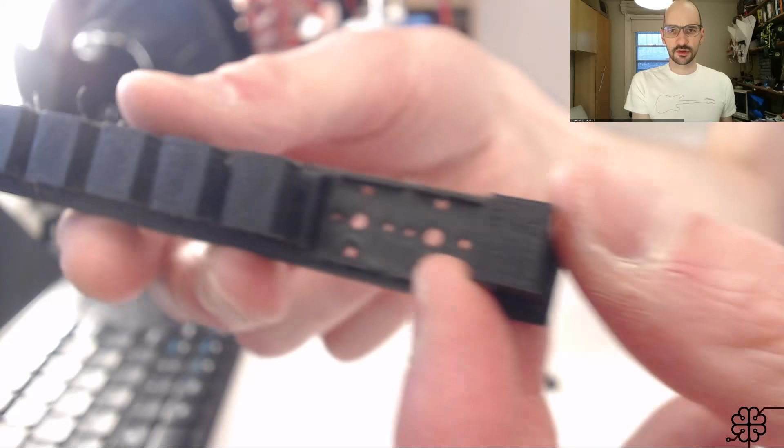it's quite close. This bracket was a two switch bracket that I printed last time, and it got me extremely jazzed about the prospect of printing out a full bracket for all the buttons and trying that in the keyboard. So that's the next thing I did, print out this bracket right here. Sorry, I'm still trying to get used to this focus control. So there you have it. It was this multiple switch bracket, and I put that in the keyboard, and it felt great. It was really motivating.

However, it wasn't quite exactly right. It was off by something like 0.5 millimeter on the total length, and as we'll see soon, I definitely need to redesign the way that these switches fit into this thing. They need to be seated much deeper into the keyboard. The reason I'd come up with this flat design at the very start was that that's the way the original rubber dome switches worked.

But unfortunately, after having looked at my keyboard and taken a lot of measurements, I'm pretty sure that they changed the inside of the version 2 of these keyboards, which had these switches mounted in by default. The switch really has to sit much deeper inside the keyboard than the original rubber dome switches. So we'll be changing that design. I've started on that. You'll see that in Fusion 360 soon.

And so you can see here I've got all these little spare parts. All these things are tests that I made. I iterated 1/4 millimeter here, 1/4 millimeter there, on designs, and got everything dialed in right, such that the length would be okay, and these little ridges here that we print, I use them as registration features, so they fit within the keyboard.

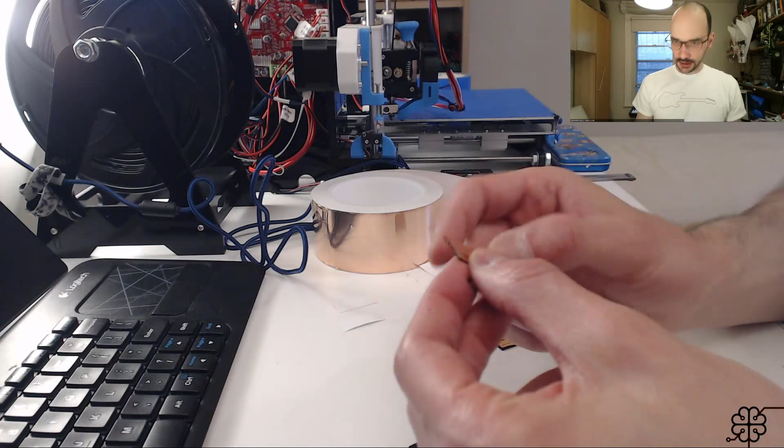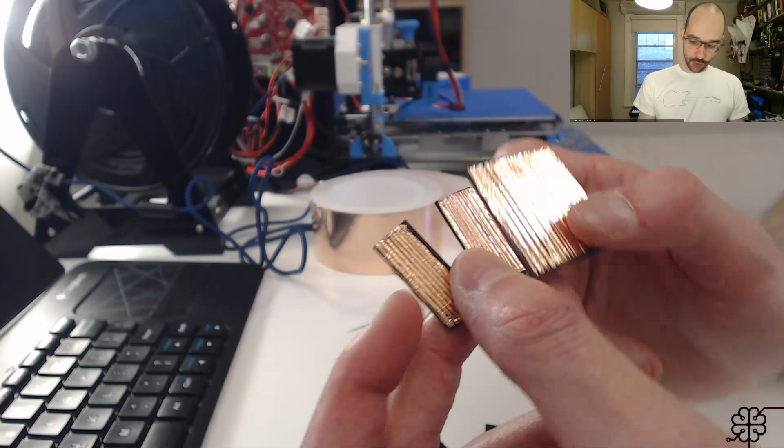Then another thing I've done, which I'll show here quickly, is to iterate on the design, or rather the tolerances, for the actual printed circuit board later on. So the idea here is that I've printed these pieces. I'll show them up close in a moment, and you can see that they've got these, well, really what they are is isolation trenches, if you will. And what I've done is I printed this design. I'll show what it looks like in Fusion 360 in a moment.

What I did is I took this copper tape and I just stuck it on top. I put a layer on top here, and then I pushed into it a little bit with my thumb so that I could see the grooves. That's the word I was looking for earlier. Grooves. So I could see just the outline of the grooves. And then I took a hobby knife, like an X-Acto, and I ran it right down the grooves. And the purpose of this is to cut the tape.

The tape's adhesive is very strong. It doesn't move when you cut it, and the tape is pretty thin, so it doesn't give much resistance. You can cut through it pretty easily.

But the interesting thing with this that I was trying out is basically a variety of widths of grooves and a variety of depths of grooves. You can see here, this half here is slightly shallower than this half here. And the reason for that is because when you cut the tape, the knife kind of pushes down into the tape and it separates it into the groove, and it creates an isolation there between these two traces. And I tried this in the past for another project with Halloween, and it actually turned out great.

This time I have a bunch of ideas to kind of simplify the process and the design. I also only have a single-sided PCB to do this time, so it's going to be much simpler. Or I hope. There's a few sort of constraints that come with working inside the keyboard and stuff like that.

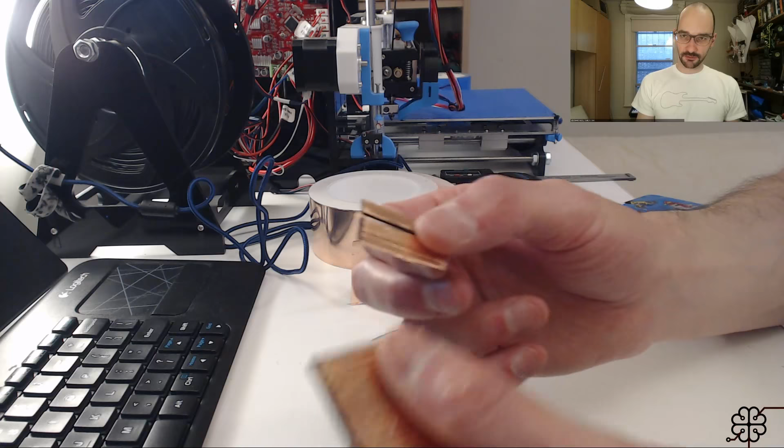But what's good about this is that pretty much every single test, every single trace on these boards here, and there's what, like I think two dozen or more, they all turned out great. I mean, cosmetically speaking, some look better than others, but functionally they're all the same. All the isolation worked properly. So it seems like I have quite a bit of leeway there with these tolerances that I can play around with when designing the final PCB.

One thing that I'll have to worry about actually is if you look at this bracket, let me take control of the focus once again, but if you look at this bracket here, what happens is the switch sticks out through the bottom of the bracket like that. You can see the plastic pins here, they stick out, and you can see the metal pins as well. Now these metal pins here, and on this side here, these are the pins that I need to solder to. When you close the switch, these are the pins that are going to actually close the circuit. But as you can see, the pins are not super long.

I'm not actually sure the depth of this mounting plate that I printed there. I initially thought it was like 0.5 millimeter, but now that I look at it, I think it's a bit more than that. Let me just measure that quickly. It is actually 1 millimeter. So that's good. That means that I have a bit of leeway here. Actually, I'm less worried now that I have 1 millimeter. I probably have another millimeter or so that sticks out. So 1 millimeter is more than enough for the thickness of the PCB.

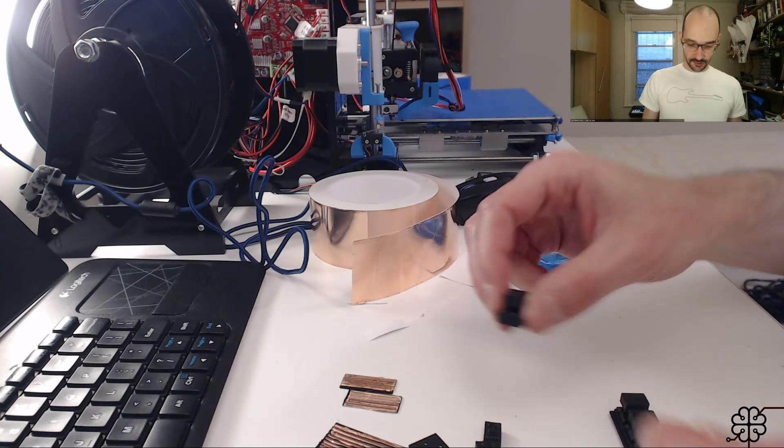But I'll have to think about how to print this, because I obtain the best results when the isolation traces are on the top side of what's being printed. If this stuff is on the underside, then the first layer of a 3D printer, you have this problem with any printer, has to be squashed a little bit into the print bed for the adhesion to be good. Otherwise the print just comes off the bed when the printer works.

And so that creates this phenomenon called elephant's feet. Now it's only called elephant's feet really if it's super pronounced, if you really wind up with this sort of flattened shape because everything was squished so hard into the plate. But even if you dial it perfectly, you still kind of want this smoosh on the first layer, so that everything sticks properly. And of course that affects the width of the isolation groove here, and it makes running the knife down it a little more uneven,

and I suspect it would make the whole process a little less reliable, which obviously we don't want. I mean, it's not like an incredible amount of traces here, but I'd love to figure this out so that it was kind of a more generic method for people to work with very short prototype runs in the future. Because I actually think this is quite convenient to work with.

And I'm also going to try to work out some kind of a workflow on the Fusion 360 side, such that it's actually easy to work with this in Fusion 360 as well, to create the isolation grooves and everything. So without further ado, let's go back to the desktop for a minute. I'll show you the work I've done in Fusion 360 since last week.

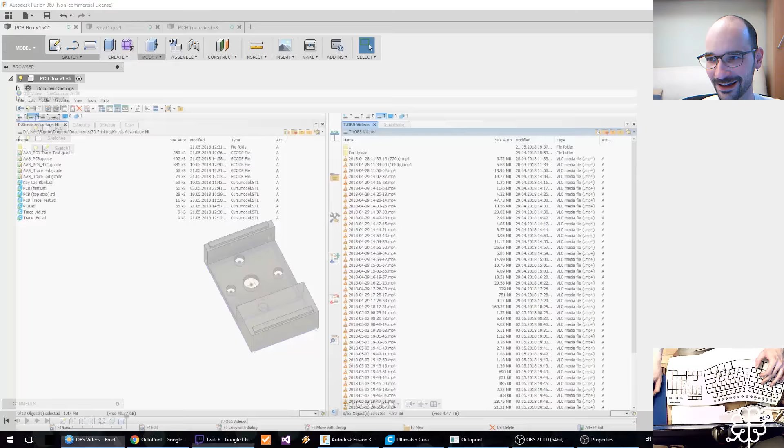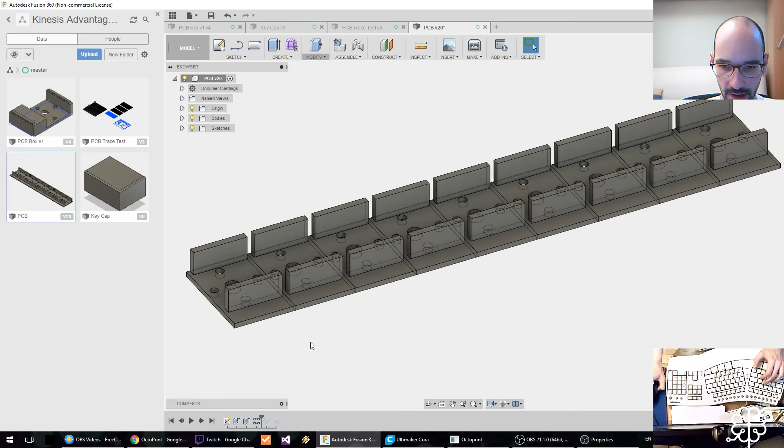Thanks for joining. So what I wanted to show last time is this old version of the PCB that I had. It looked a little like this, you've seen me print this. Obviously these registration ridges are a little deeper than last time, just things I tried out. But one thing you'd seen me do is when I was mirroring these things over, I was trying to do this join operation, and it wasn't joining up quite right.

What you saw me do, which kind of sucked, was in this distance field, I'd subtracted just a smidgen, just a little iota, so it would force the bodies to overlap, and then the combine operation worked. I kind of glossed over that in the video because I wasn't 100% sure what was going on, and I made a mental note to come back to it, which I did, but I didn't want to spend an hour digging into it.

As it turns out, what was wrong was that with the PCB sketch, I basically had two lines on the right side, overlapping lines that looked like they were exactly in the same place, and they were, but they were driven by separate dimensions, separate mathematical equations. Because of this, even though the lines were physically overlapping, it actually created something.

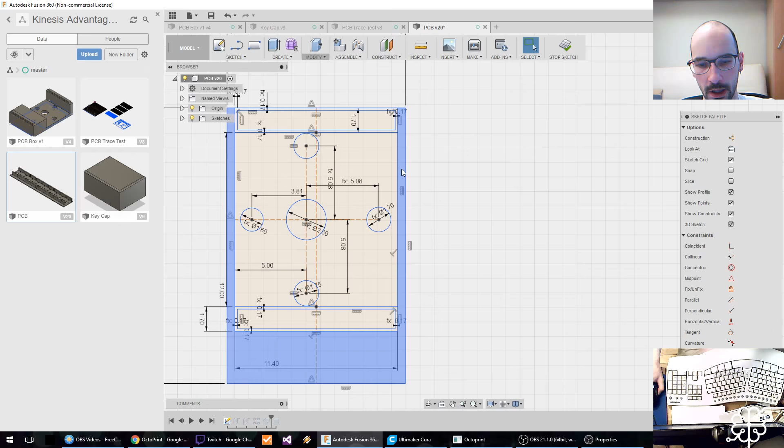You see how when I mouse over this, this is called a profile, could also be called a region. It's an enclosed area of the 2D drawing that you then extrude. When I say extrude, I mean this—this is the first part that I extruded here. You select which of the profiles you're going to extrude.

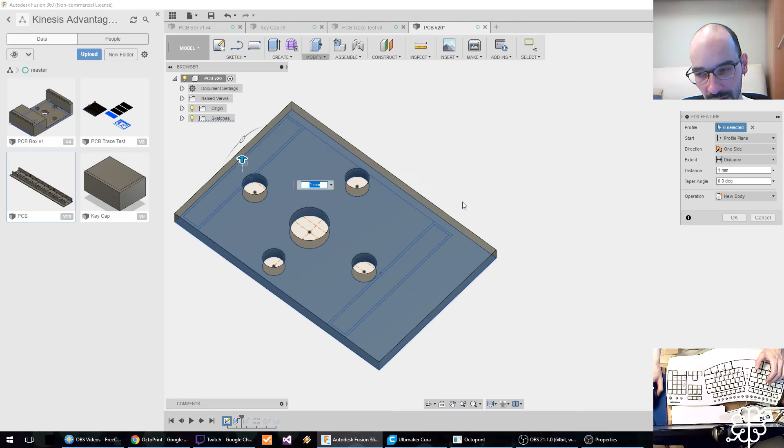It turns out there was this extra invisible profile along this edge where there was my duplicate line, and that profile had not been selected for extrusion. So there was effectively this infinitesimal gap on this side, and when I was repeating the design over and over, this gap was preventing the bodies from joining up.

The reason this became apparent eventually is because I was playing around with this parameter, basically the key tray width. If I make this extreme, you can see it widens it—the width becomes everything, all the dimensions are keyed and programmed properly. But because my profile hadn't been selected, I saw this big, tremendous gap show up here.

And I was like, aha! So there's something there I'm not extruding properly. I went back and saw the missing profile was showing up in the sketch, and I was able to select that for extrusion, and it fixed all my problems. So I'm going to undo this.

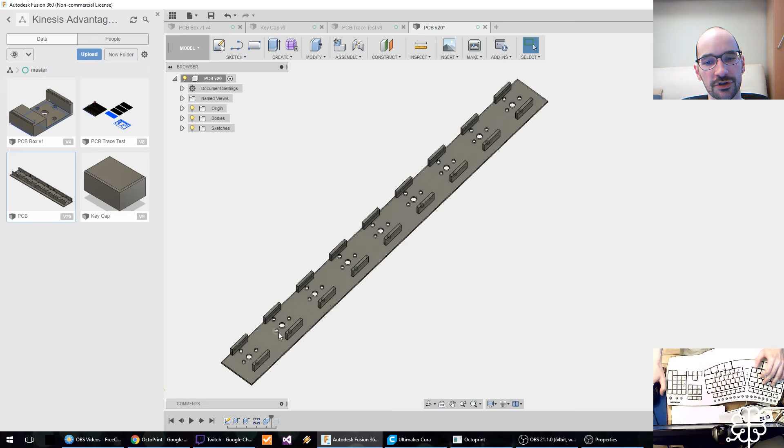This was my original version of the PCB. I moved away from this design for a couple of reasons, but one of them is really important. You can see here what I was trying to do was, if I mount the switch inside this bucket, the switch would be facing upwards. Let me sit properly in my chair so you can see my face when I talk.

The switch was mounted upwards, and this part, these ridges, were used as registration features so they would sit inside the keyboard. There's a kind of grid inside the keyboard, and these would fit perfectly inside this grid.

Originally I pointed out last episode that I realized the switches needed to be mounted even deeper, so instead of mounting them as close to the faceplate as I could, I tried to make these ridges thicker, or taller, so they would rest against the front plate of the keyboard. I'll show that on the other camera in a minute.

But the problem here is that though the grid against which the flat plate rests is completely flat, these ridges rested against the actual front of the keyboard, which you may remember is actually quite curved. It's curvy.

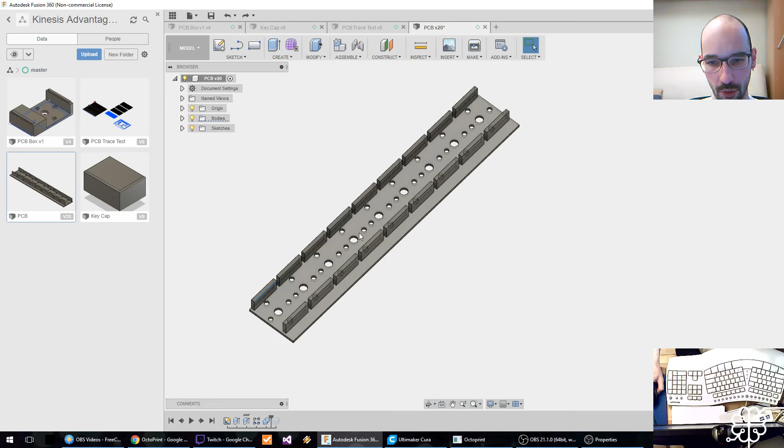So what was happening was, on this side, these were kind of bumping against the faceplate, and the switch was mounted at the right depth. Then as you moved over inside the keyboard, there were curves in the faceplate, and it was actually putting the switches at variable depths inside the keyboard. Not only that, but because of the curve, the full length of the ridge would not rest properly on the faceplate, which is incorrect.

So let me go back to the other camera for a sec, just to show you exactly what I meant.

So let me take over the computer again here.

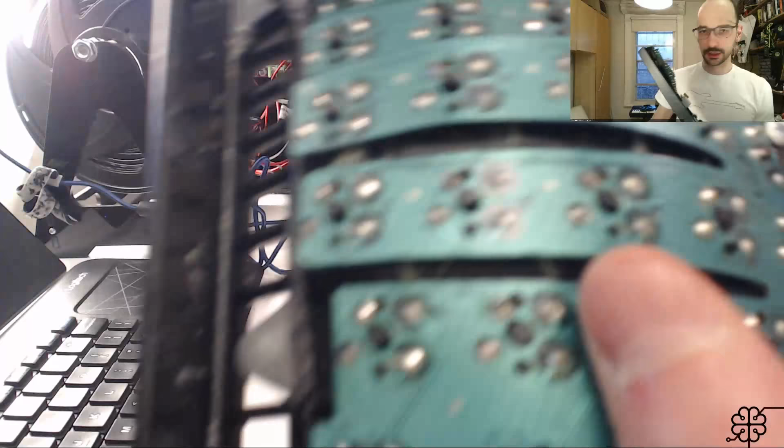You can see here, this is what I was talking about earlier. I'm not sure whether I should actually just manual focus this. Let me try for a second. Is this too much? It is too much, let me scale that back out.

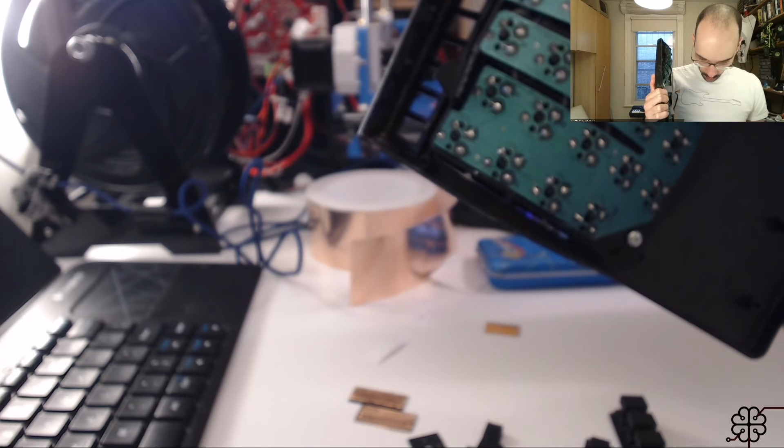So you can see this kind of grid here around each hole for the keys. This is where the ridges I showed earlier would wind up registering properly. You can see these ridges quite well on this print. So if I fit the piece inside the keyboard, it fits nicely and doesn't move left to right because the ridges fit inside the grid.

Now obviously it moves a little bit on this side. This is something I fixed in later designs, but it doesn't move sideways much, if at all. However, if you make these ridges thicker, what happens is instead of resting against... let me tilt this. Yeah, there you go. So instead of resting against these little ridges here, it rested against the actual inside of this part, the very underside of the faceplate, which I don't know if I can tilt it enough to show you.

It's kind of hard to see, but the grid at the top is completely flat. But maybe if I show it like this, or maybe like this. There you go. You can kind of see how this top part here is super flat, but the inside of the grid is quite curved, and the profile here varies quite a bit.

So these ridges were trying to rest against the faceplate, but in this hole they were much more deeply seated than in this one over here where it's quite shallow. So that's not correct. I had to go back to the drawing board.

And then what I did is I printed more something like this. Well, this actually was my test with the super deep ridges there. But the latest prototype that I have looks a little more like this.

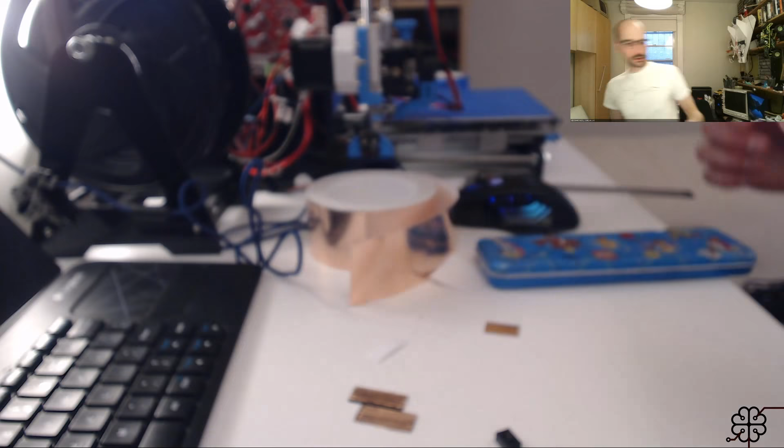Let me set down the keyboard for a minute. It's the one I showed earlier. I can actually crank up the zoom just a little bit for this. Whoops, there we go. And so from the side, what this looks like is quite different, right?

The registration ridges are still there. They're very small though, but thick enough to actually fit inside the keyboard and not move. I am going to make them a little thicker in my next design. I think this is something like 0.2 millimeters, maybe not a lot. I'm not even going to try to measure it.

And if I make it a bit thicker, you can see how there's this deep groove here, like a box, a seat almost for the switch. That allows the switch to sit much deeper inside the keyboard. And the idea is for these flat parts here around the grooves.

So you know what, I should grab something to point. There we go. So this flat part here - whoops, sorry about that - this flat part here, and the flat part around the ridge, it's very small, but there is actually a lip around this ridge. These are going to rest against that flat frame inside the keyboard.

But even this is not quite right. I was playing around with this earlier. It's getting there, but there's a few issues. And the reason for that is actually I'm on the right track. It's just that when you look at...

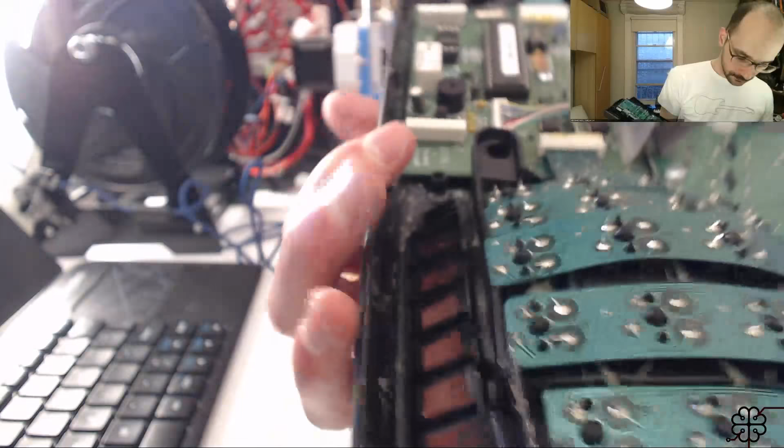...inside of the keyboard, what happens is you've got these other things starting to come into play now. You've got these little ridges here, here, and here. I believe these are known as ribs in industrial parlance. There's also these nubbins here, that's a technical term, that used to hold down the original PCB.

Now, anybody who wants to replicate this modification, I hope this is the only modification you have to make to your keyboard, other than soldering these connectors.

Eventually this connector here is going to have to probably go away because it's going to be easier to solder to the pins directly than to reuse the original ribbon connector. But you have to cut these little plastic nubbins off, the first time you run into problems with your function switch. As soon as you want to get inside the function switch assembly, it's the only thing that is irreversibly assembled inside the keyboard, meaning it's not screwed down, and you can't just trivially take it apart and put it back together exactly the same way it was.

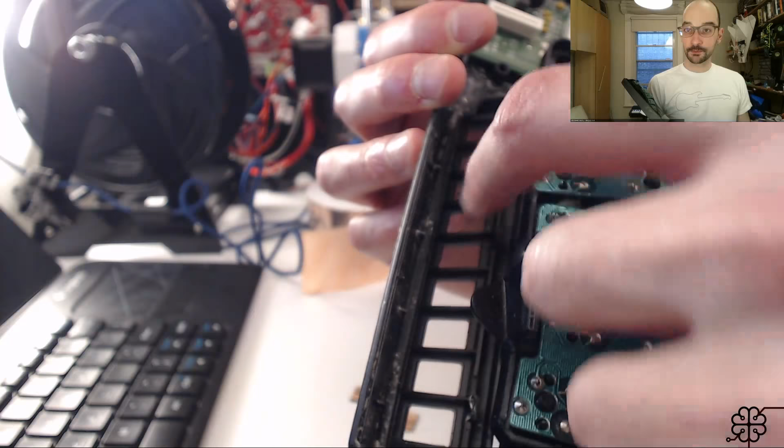There's a plate there, a plastic plate, and then there's a bunch of... or sorry, it's not hot glue. What they do is they put the plate through these plastic things and melt the plastic. They melt it down above the plastic plate, and it holds it in place very securely.

Now, as soon as you want to get in there, you have to cut these away. I used a very sharp knife the first time. That allowed me to extract the plastic backing board there for the PCB, and then I just hot glued it back in place, which was more than enough to hold everything in place.

As it turns out, if you look inside the keyboard, I'm going to try not to rely on the shape of these nubbins, because if you cut them off completely, it should still work. But what I'll probably do is make it so my design kind of rests on the underside of this bit here. Even though it wiggles a little bit, this actually rests against the bottom of the keyboard here.

There are these plastic prongs here that rest against the bottom faceplate, so when the keyboard's closed, it doesn't move at all. I might actually try to exploit this screw hole here, which interestingly enough does not appear to be used in my version of the keyboard. It appears to be quite blank. I can see that it's been, I think, tapped even, I'm not sure, but there's certainly no screw that goes there on my keyboard. I'm not sure what it was for, maybe it's for another revision of this keyboard. I'm not 100% sure, a leftover.

So, yeah, there you have it. What happens with this bucket prototype here, let's call it the box or bucket prototype. I'm going to switch back to autofocus for it.

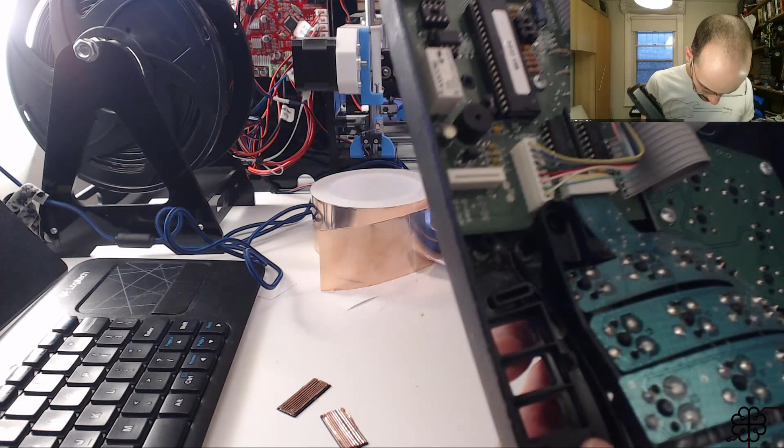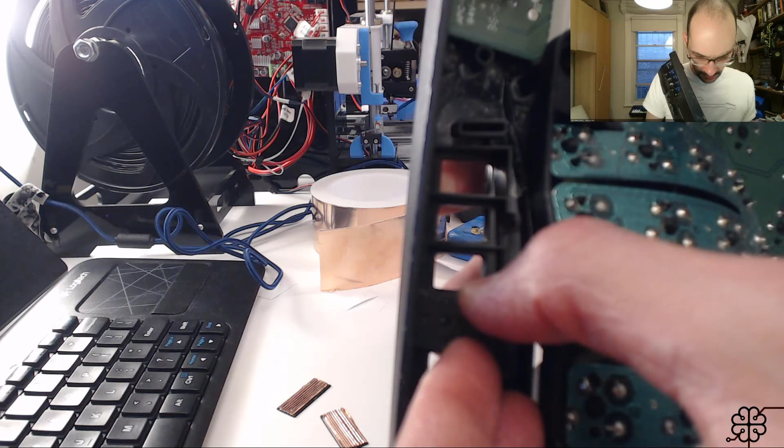Now, yeah, if I line up the back side really properly, then the front side doesn't work anymore. So the switch is a little too high in the bucket, so I'll have to change that just a little. It's like a smidgen, a very, very small amount, like not more than, I think, 0.5 millimeter or something. Oh there, we lost the switch. So move the switch down a little bit. I'll do that in Fusion 360.

Do I need to do much else actually? This thicker part here at the bottom is going to help with the rigidity of the whole design, because I'm probably gonna have to make the bottom part a little weaker, actually a little thinner. I'll make the ridges a little thicker as well, and I'll have to figure something out for these ridges here.

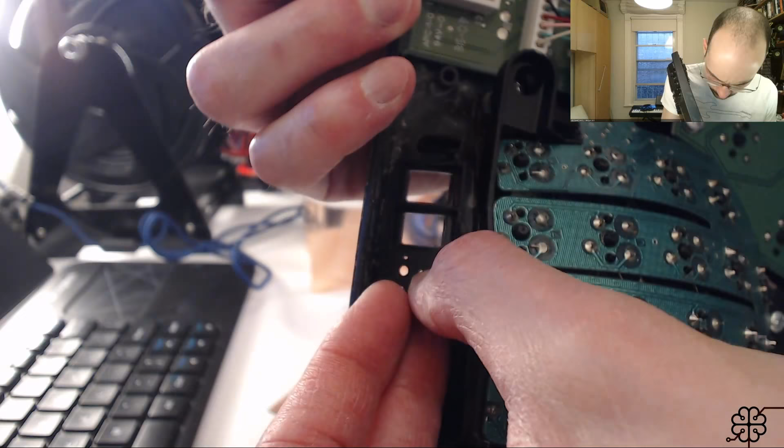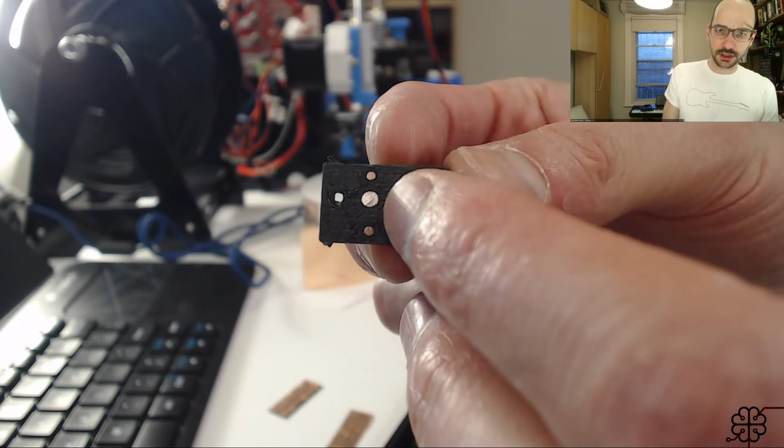To make sure that I don't run afoul of these ridges here. So, does it actually fit in there? Yeah, it doesn't even really fit inside the hole because the rib is protruding too much. Yeah, okay, so, if I move the switch down a little bit in this design, it gives me a little leeway to maybe kind of chamfer this edge or something to try to get rid of the rib.

So let's do that. Let's go back to the other station for a sec and start a print. And then probably what I'm going to do is I'm going to start on the PCB design. All right.

What's going on here? I've lost my music. All right, well, that's sad.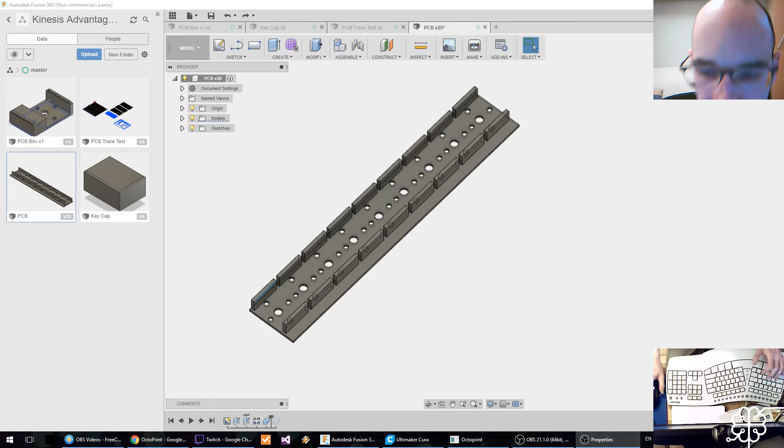Oh well. All right. So let's close this. No, don't save. It's my PCB trace test, my keycap. Probably make the keycaps a little smaller even. All right, so we said the ridges need to be a little bit thicker. Oops, sorry about that.

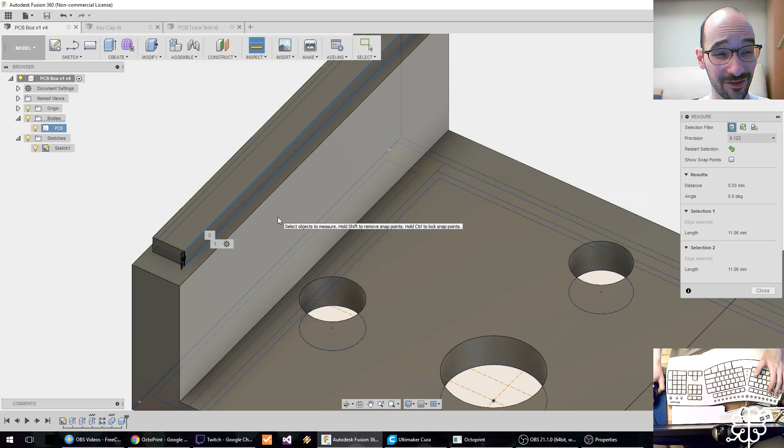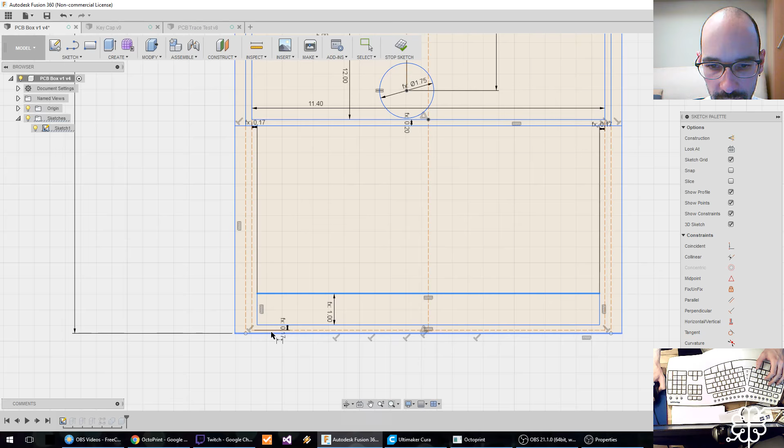But that moves the wall. I got this keyed wrong. Okay, wait. This is not correct. Okay, what's going on here? This is between this line and this dimension here. So I'm going to get rid of this dimension here. I am going to instead dimension from here to here, which I know would be good. Okay, 1.27.

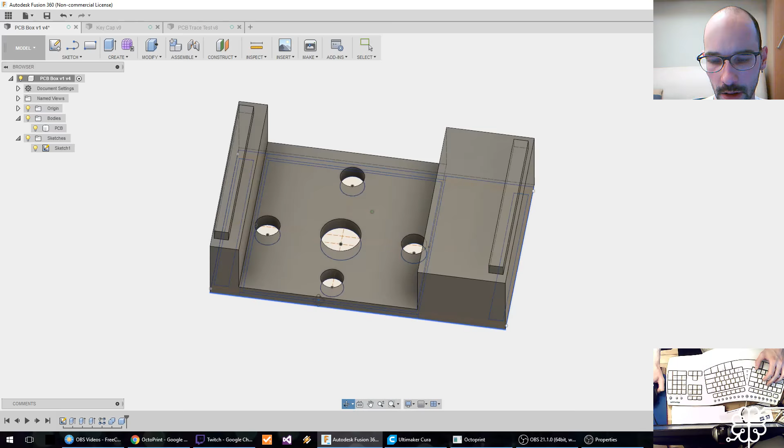So now, if I move this guy down, all right, the bottom ridge doesn't move, which is good. And the box moves. All right, that's good. So 0.5 millimeter. And then I said I was going to try to do something about the chamfering here. So let's suppress this for now. Should I chamfer before or after the depth? Probably before. Okay. And then let us chamfer this.

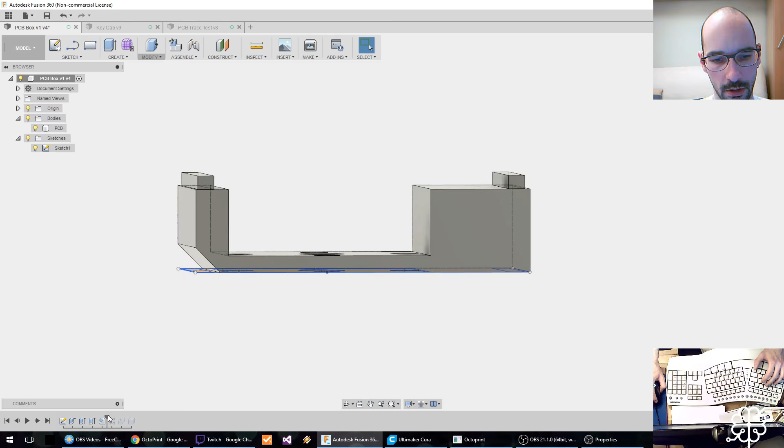Yeah, see, I don't want to chamfer too much, or maybe a draft. I don't want to weaken it too much. That's the thing, right? Well, it looks like I can actually do a little bit more. Maybe like 1.5 millimeters. There we go. And if I, all right.

Actually, sorry. This no music thing is driving me mad. Let's figure out what's going on here. Will Winamp work? It does. So what's going on with Plex? Is it somehow dead? No, there we go. All right, the music is back. Sorry for this brief interruption.

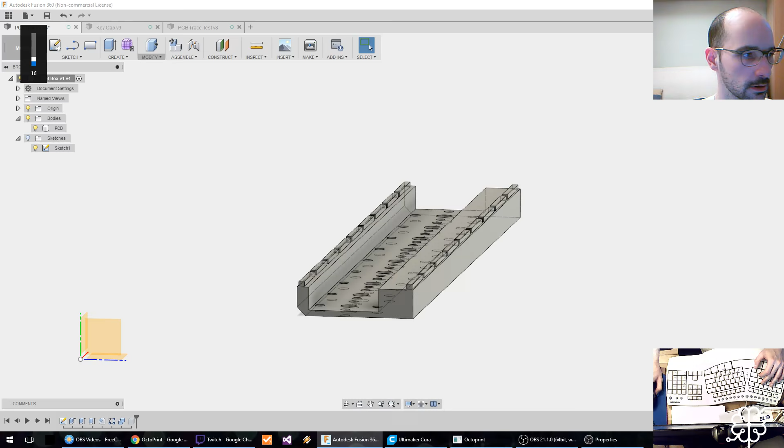All right, so I think this looks promising. Now, if I unsuppress, this feature is just to do one at a time, right? I don't want to have to print the full thing, though I could actually print two to make sure that the registration still works properly. Okay, so I'll print two. Like that. Alright. This doesn't look too bad. Oops, sorry, that was a miscued command.

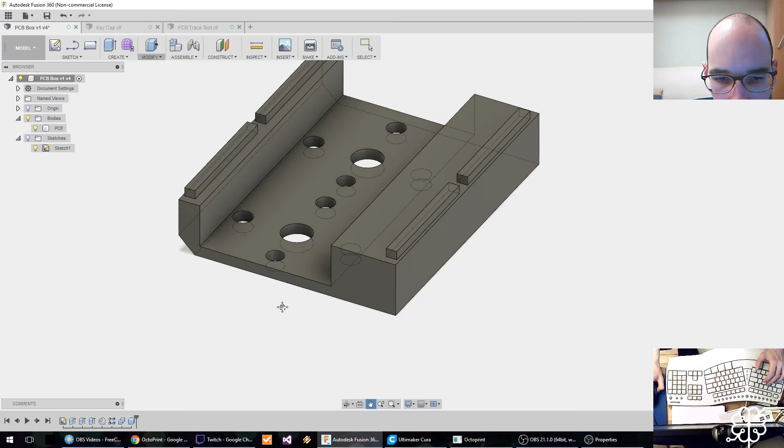See, this is a 45-degree overhang as well. A good printer, yeah, welcome back, Daru, will typically print up to 45, that's pretty safe. 45-degree overhang, meaning that this is going to be flat on the ground and it's going to print like this in a basically rising slope above nothing. But if you go up to like 50 or 55, then you're starting to get into wobbly land. But really good printers will do up to like 60. I think some printers even do like 70 with reasonable results.

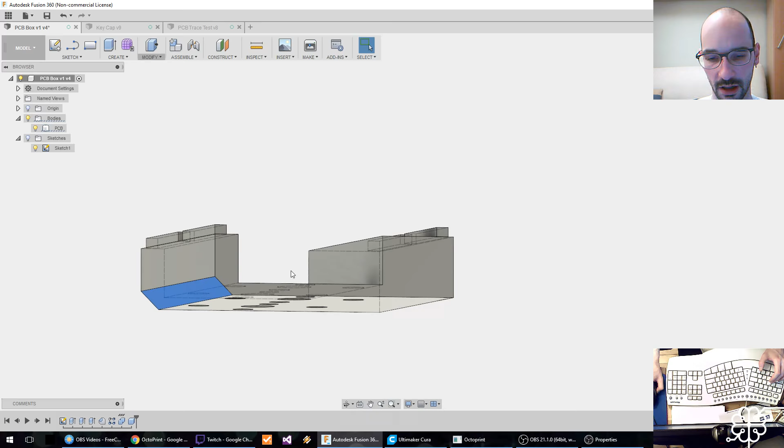Now mine, I've never really tested it. I've never done an overhang test. I know it handles 45. I think even 55 it'll do properly. So 45 should be good. All right. Is this good enough? Yeah, let's try that. All right.

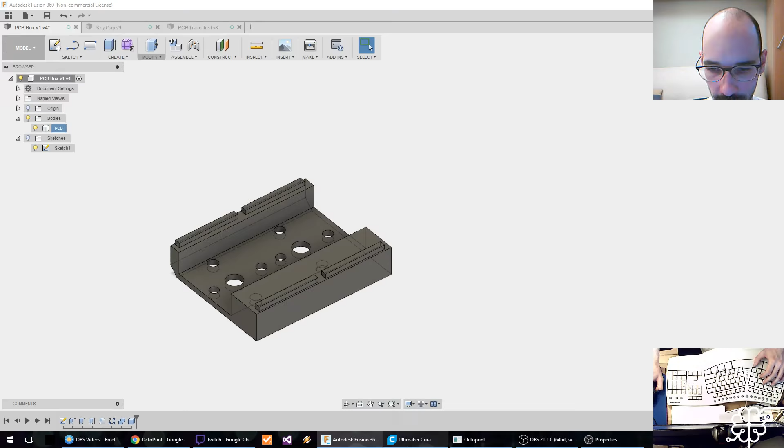So let's export that to the PCB. I just keep overriding the same file. Don't really care. The old designs aren't any good anyways. This is the slicing software that I use to prepare it for the printer. And then I'm going to prepare this. I'm going to prepare the printer, make sure the printer's on. And victory.

Just check to make sure that it actually showed up properly. Because it's, there we go. Alright, that's good. Now let's go back to Octoprint. And so let's reconnect to the printer. There we go. Let us set the temperatures for preheat so that we save a bit of time there.

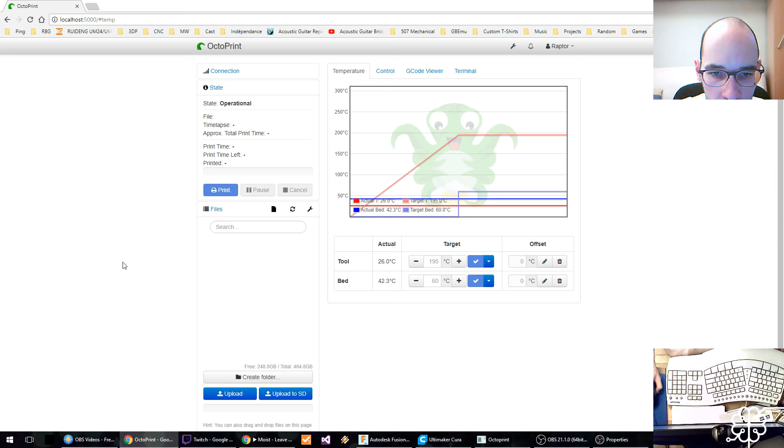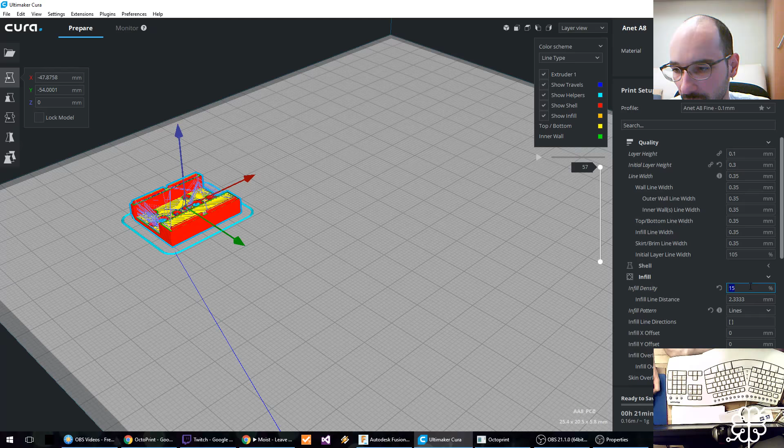I'm gonna go and, that's not right. Was it saying 21 minutes? What if I... Nah, it's not going to make much of a difference. Oh, this would make a difference, though. If I actually print it twice as thick, the quality will go down, but who cares?

For this, normally for the final print, I'll print it at 0.1 or even 0.05. For just dimensional prototypes and stuff like that, it's not worth it here. I mean, some of the finer details, maybe I'll get less detail out of, but I've run a couple tests at 0.2 before, and it was fine. So let's try this then. So 12 minutes, that's decent. Let's save this over as the G code.

Then let's upload this. So what I'm doing now is I'm uploading this to Octoprint, which is still running on this PC. And I'm going to print. So now it's estimating a good 12 minutes, but the bed's already heated up. The red line here is for the tool, so the extruder number 1 on my printer, which I only have one extruder, so that's totally fine. It's basically the bit that prints the plastic.

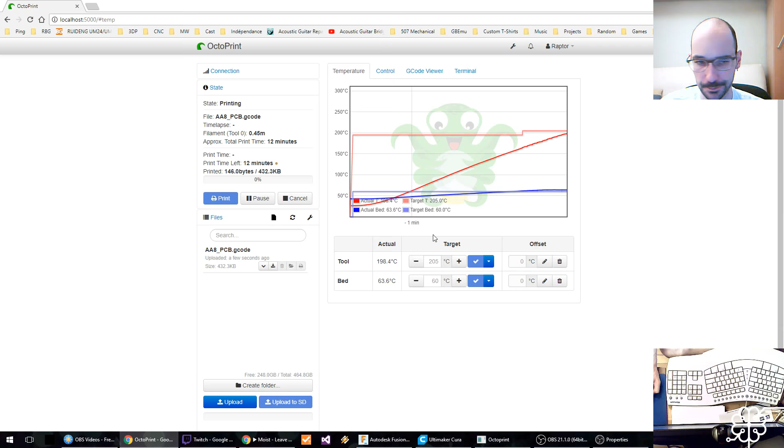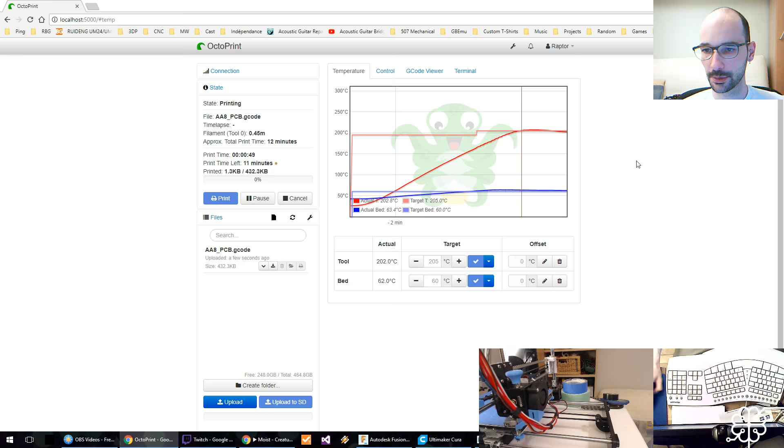So I can actually set up the camera here just so you see what's going on. All right. It won't make much noise. It'll be less pronounced a bit later on. What's cool here with Octoprint is because it's actually driving the printer, let me turn the webcam down a little bit. I actually just tend to slouch in my chair. I know it's not good, but there we go. So it's actually going to visualize what's going on in real time.

Now, what's happening right now is it's actually performing what's called the homing sequence. Now it's done the homing sequence. So there you go. It's printing what's called the skirt, which basically is just used to prime the extruder, make sure the plastic's flowing properly. I can see on the camera that it is. There we go. So you'll see the little pieces of plastic come out very soon. In fact, if I do a quick, there you go.

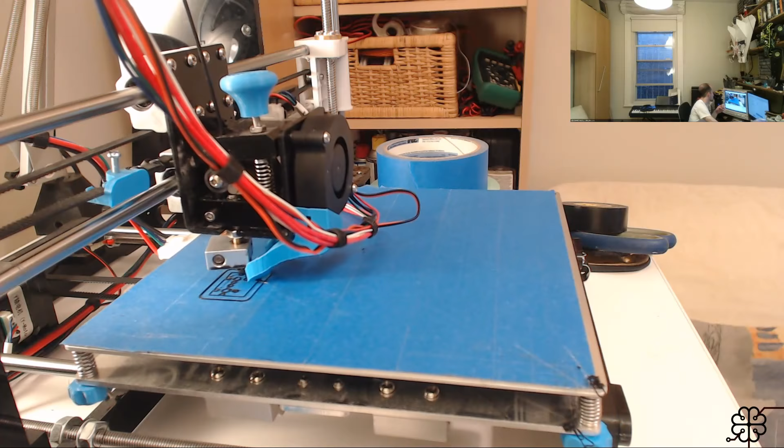Whoa, what was that? Oh, that was weird. What happened there? I see the fan snapped off. Still looks all right. I'll have to check what's going on here afterwards. All right. Never a dull moment with a printer.

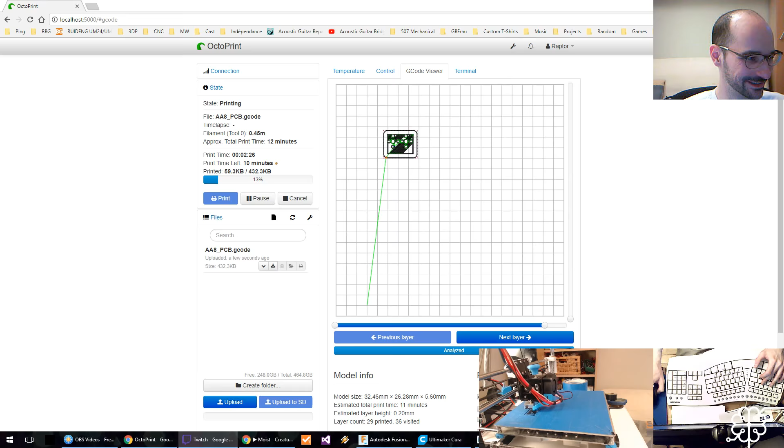All right. So what we're going to do now is I'm going to start working on this PCB design. So the underside of the switch tray here is going to have a PCB. Basically, it's going to have traces and stuff. But I'm going to need to replicate what's going on with the original PCBs here. These flexible things that I showed on camera last time.

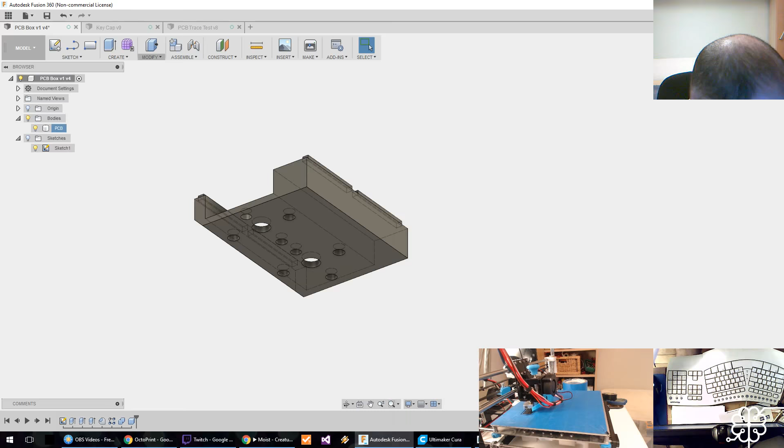Now, I'm wondering which one I should start with. I've kind of been iterating on the right side of the keyboard, which when you're looking at the inside of the keyboard is kind of on the left side. So let me just make sure that I've got the right one here. So I'm not showing this on camera, but it's fine. I'm just trying to figure out which ribbon is which. All right, so the one I've been iterating on is this one, our lucky winner.

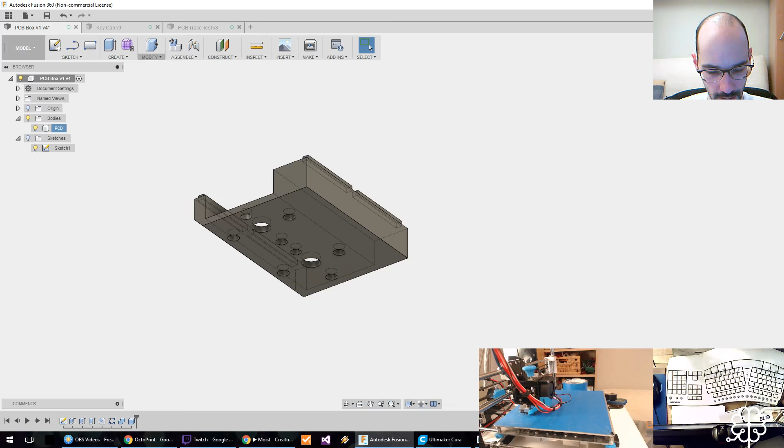All right, so I've got to replicate this design. Now, as it turns out, this actually turns out to be the more complicated one. The other one appears to be a little simpler. They're not symmetrical for some reason. And I'm just gonna stare at this for a minute to see what's going on here. Okay, so, okay. Okay, let me switch back to the other desk and I'll kind of outline what I'm doing here.

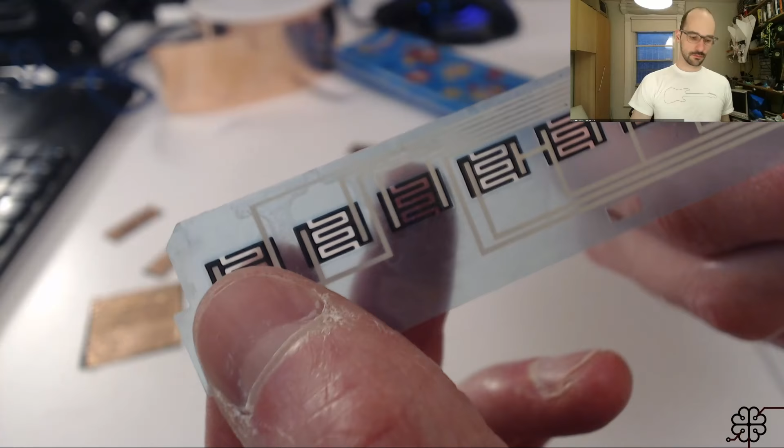Let me point the camera down a little bit so I can see what I'm doing here. So, what's going on with this thing is that, let me turn the focus manually again, like this maybe. As you can see here, there's a series of black parts. These parts are the parts that the rubber dome initially just pushed into. And you may recall that I'd explained that basically there's a graphite pad.

These are conductive, and there's a graphite pad on the bottom of the rubber dome. And as it makes contact with these, it closes the circuit. Basically, it allows the current to flow from one of these black parts to the other. And what happens here is these white parts are effectively flexible circuits. They're traces that are also conductive. And you can see that there's a pattern here, basically. Some of them are shared.

So this, for example, this bottom trace here is shared between these two black pads here. And I'll explain why that is in a moment, but you can see that the pattern kind of repeats further down here. You can see that this trace here, there's kind of this H shape. It's shared between these two buttons here. And it's also shared with this button here. And then this button has its own thing.

And then there's another one that's shared here between all three. If I try to point at this again, maybe using the knife, that'll make it clear. But there you go. This guy and this guy, if you follow this down here, it also connects to this as well.

So what this means is, if you think about the way these are organized, logically speaking, I'm not going to go through the whole theory of how to build a switch matrix here, but generally these things are built as a grid, and you've got a certain number of rows and a certain number of columns. Now that has nothing to do with the physical layout of the switches. It has everything to do with the electrical or logical layout of the switches, and that's exactly what we're seeing here.

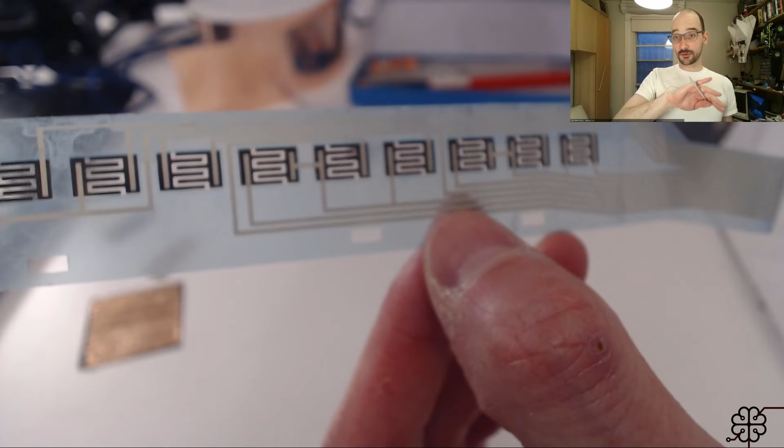It's basically a way to multiplex or connect multiple switches to a few input lines on the microcontroller. If you're doing this the simple way, and this is how it's done here, if you have, for example, 4 rows and 4 columns, that means you need 8 pins on the microcontroller. So number of rows plus number of columns. But you actually get 4 times 4, so 4 rows times 4 columns as a number of switches that you can read from the microcontroller.

So that's what they've done here. In order to minimize the number of pins that they required probably on the microcontroller, and also the number of traces on this ribbon, they arranged these in a logical grid. Now, I don't know how they've envisioned these internally.

I'm like swinging this knife around here. I gotta be careful not to gouge out my eye.

But you can see that these two form an arrangement, as we saw earlier. These 3 also share a lead, and these 3 also share a lead. So you can picture that as a row of 3 switches, another row of 3 switches, and a row of 2 switches. Now, if you look at the other leads here, clearly you've got one trace here on this side that goes all the way to the end of the ribbon. You can't see this, it's off camera there, but it's straight all the way to the end.

This guy here also has his own trace, so it's not quite its own column. It's kind of weird. It's kind of a halfway design. However, I think the other ones do actually share stuff. Now this button has 2 completely dedicated traces. Is that correct? Yes, this button has completely dedicated traces. It doesn't share the traces with any other button in here.

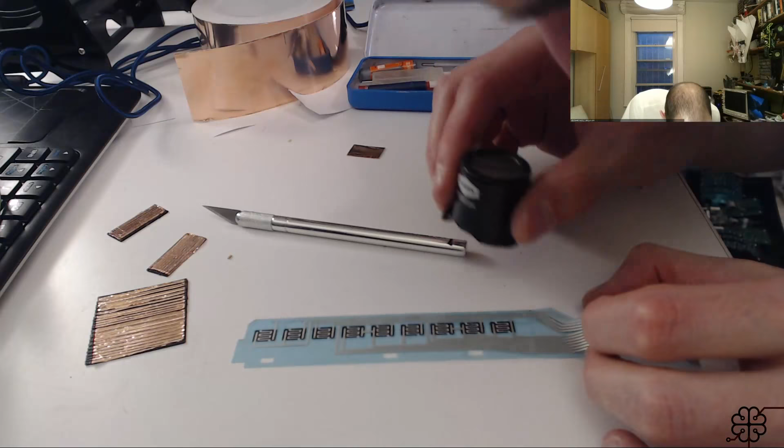Okay, I just need to really look at this from up close for a minute there. All right. Okay, it is shared. Okay, so what I'm gonna do, I'm going to draw this out, but I could just replicate the design blindly in Fusion 360.

Let me just check on the print 1 second.

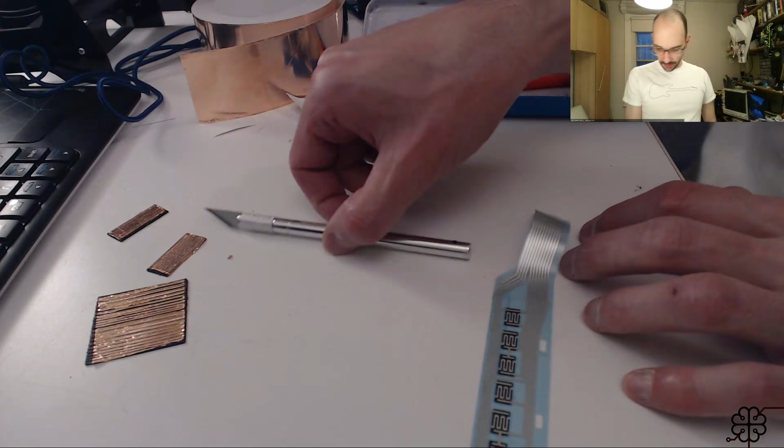It's about 85% done. About 85% done, so it should be done soon. So what I'm going to do is I'm actually going to map this out by hand with a pencil on a piece of paper. Just looking for paper over here. All right. Kind of improvising here.

By the way, I love this clipboard. I got it at an environmental object store in Ottawa called Arbor Recycled Products, 800 Bank, that's the address. And it's an old motherboard from what is clearly a large machine. I don't know what it was initially, and I've had this since, I'd say, 1995 or 96, and it's still in perfect shape. I really love it. Well, perfect. I mean, it's been banged up a little bit here, this part, but it's actually really high quality design, and I love it. All right.

So let me just check quickly. See, so even here, the ends of these ribbons, they don't actually have the same number of traces. Do they have the same number? Not even. They have the same number of buttons, different number of traces.

Oh, somebody's chatting with me. Sorry. "Looks suspiciously familiar." "Could I take a picture and use that in Fusion?" Yes. So I could take a picture. That's certainly a very, very good idea. I could trace it out with, say, paint.net or something. I could color them. I'm going to do that. That's a great idea. Thank you for the suggestion, Daru.

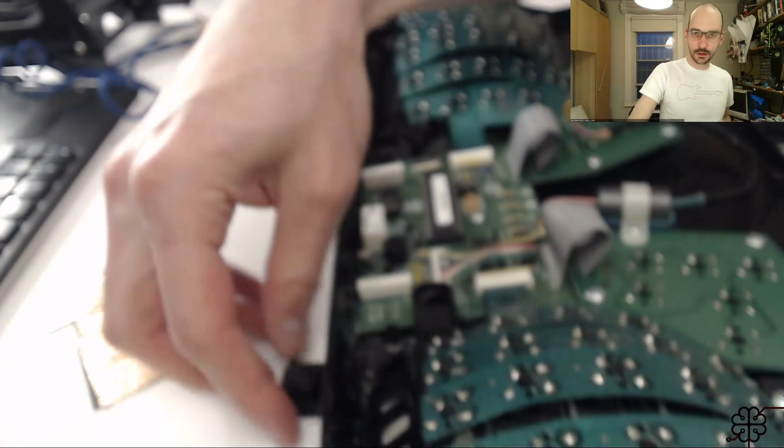Let's see what's going on if I take one of these switches and put it in there. Has a great tactile feel. The switch is well seated. Can you see that? Sort of, yeah. There you go. Well seated. Let's see how it fits in the keyboard. Let me pull down the focus a little bit to get more maneuvering room. There we go.

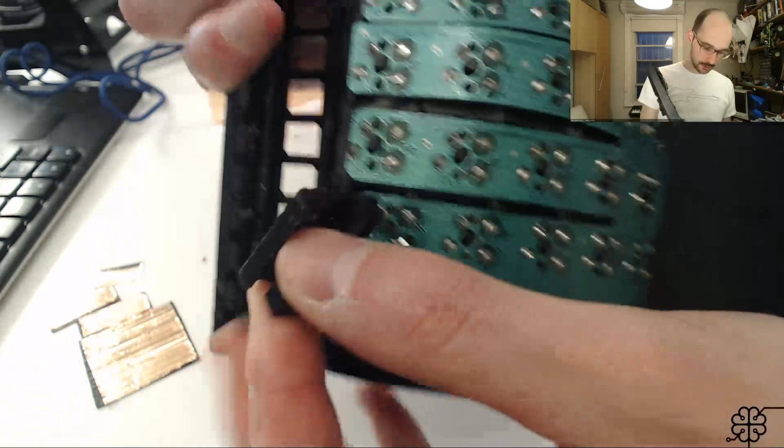So actually, you know what, let me put in 2 switches. Can I fit 2 here? Oh yeah, that's right, I've got the chamfer. Look at this. The chamfer turned out nice. Very cool. Let's see if it actually fits in there before I do anything else. Oh, this looks promising. Quite promising, in fact. Okay, so the switch is still not exactly in the right place, but that's fine. We can correct that. We can iterate on that. Keycap fell off.

I've got so many of these keycaps here. Some of them have slightly different sizes than the others. I mean, you know, tenths of millimeters. I think these are the smaller ones. I'll move the other ones out of the way. There we go.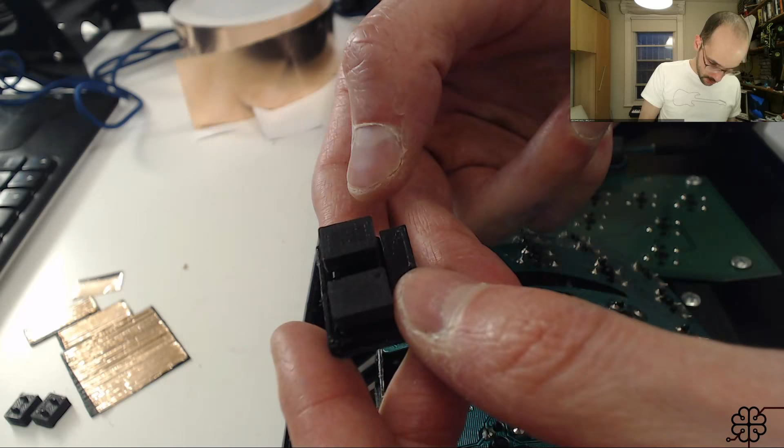And fit this other switch here. There we go. Is that okay? Yeah, that is okay. All right. Now, will it blend? Will it fit in the keyboard? Oh, okay, this I can see going somewhere. Okay, so it fits nicely. It kind of locks in place there.

But the switch is still not exactly in the right place. Well, so the next thing I think I need to do is print some slightly smaller keycaps, because these are clearly too big for these holes. So let me get on that right away. Okay.

All right. So let's go back to the keycap. Oops, what's going on here? Let's look at the hole tolerance, which I believe is actually used in the original sketch. Yeah, so the hole tolerance is this dimension here. So this is the size of the hole, which I think is about right. Not 100% sure, but I think it's about right.

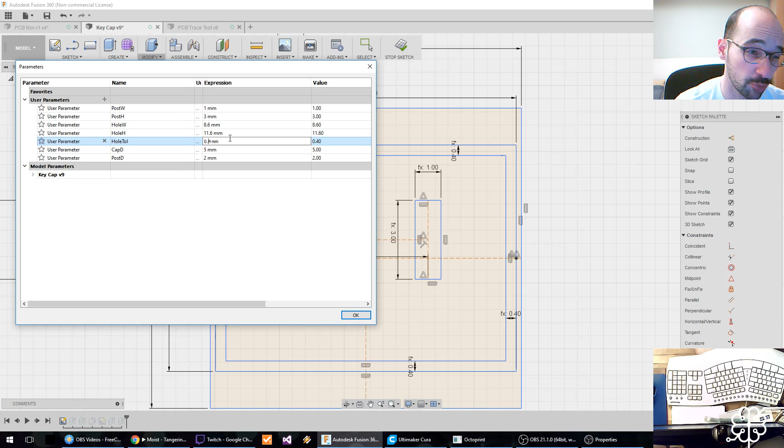And then what I do is I've been actually increasing this hole tolerance a little bit. Let me just bump this up, you know. If I bump it up, it's used on both sides, right? So if I want to shave not a millimeter, but say 0.8 millimeters, it's a bit extreme. Let us see, 0.6 millimeters, that would be an extra 0.3 on each side, so 0.7. See how that made it smaller. Stop the sketch, go back to this here.

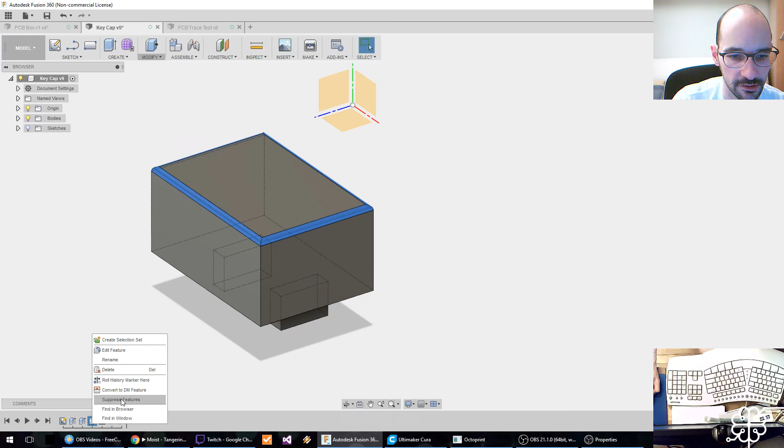I started actually printing these upside down just for now. You know what, I can actually even suppress this feature, so I don't have to clean up the feet. I'll probably switch it back eventually, but what's going on? Oh, these are the lettering, okay. So let me save this. So you see, I try to always have both things going on, like a print going on while I iterate on other stuff.

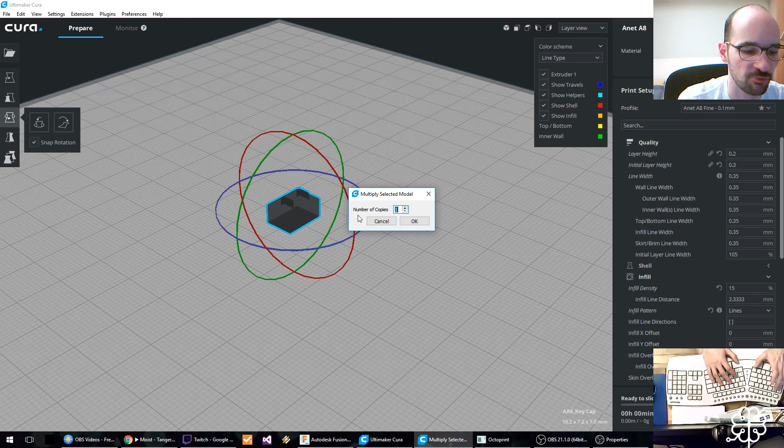Keycap here, get rid of this slice. All right. Let me rotate this out of the way like that. Let me multiply it. Let's print, say, 3. All right, 3. And then let's move this back. Like this.

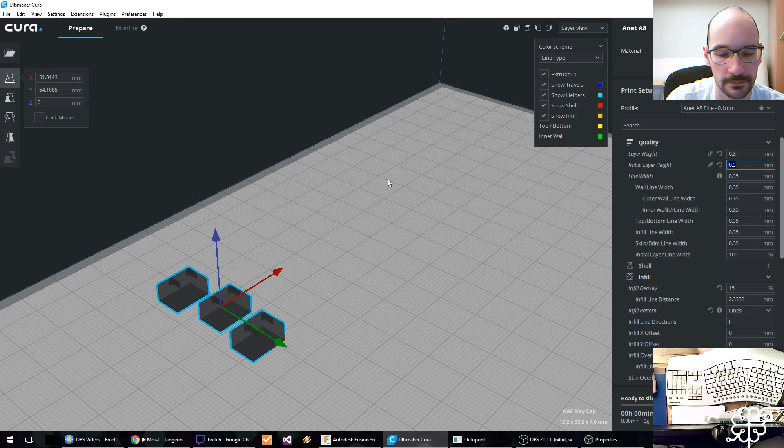It's because in the G-code, which is the text basically that the printer interprets, there are 2 types of commands for setting temperature. There's one that just sets the temperature and keeps going, and the other one sets the temperature and waits for it to be reached. Now what happens is Cura, this software here that I use, the startup sequence is always fixed, so it inserts first a command to heat the bed and wait, which is usually kind of long, and then heat the extruder and wait, which is also kind of long.

Now what I would love to do, and I probably will get around to it at one point, is when you set the temperature for the material in Cura, I would issue 2 commands that say set temperature and don't wait, set temperature and don't wait, and then set the same temperatures again, but wait this time. So you start heating both at the same time, and then you just block until both are at the right temperature.

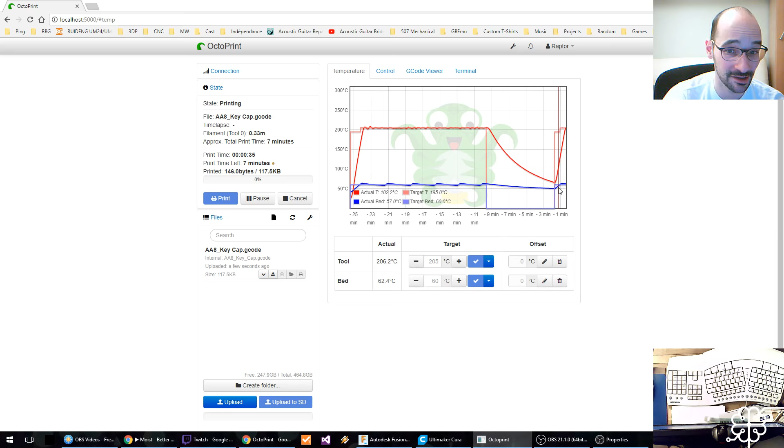I can edit the G-code by hand and get it done, but it's kind of long and I don't do it every time. My workaround is this manual workaround where I issue 2 commands by hand to preheat, and then the first one just waits for the bed to be heated, but while the bed is heating, which normally takes some time, the extruder is already trying to reach the temperature, which saves some time.

Actually, on a short print like this, this printer can take up to 2 or 3 minutes to heat both up completely. So it adds quite a bit. If you're printing for 6 minutes, this is adding like 50% to the print time, which is long. So yeah, you could write a Cura plugin to do that for you. They're very simple. They're Python plugins, but I haven't looked into it yet.

Now let's see if the phone uploaded the pictures. It says it did.

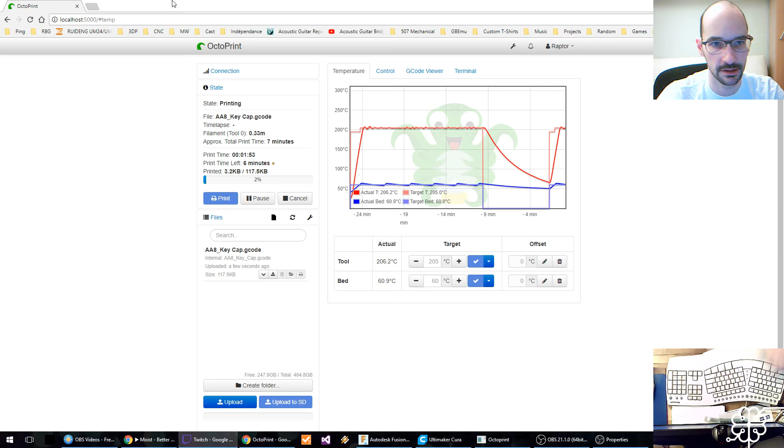All right, there we go. We've got a couple pictures there. This is good. Did I have anything else to check on the original bracket before I get back to this? You know what, I'll wait until the keycaps are printed. Let me just check quickly there.

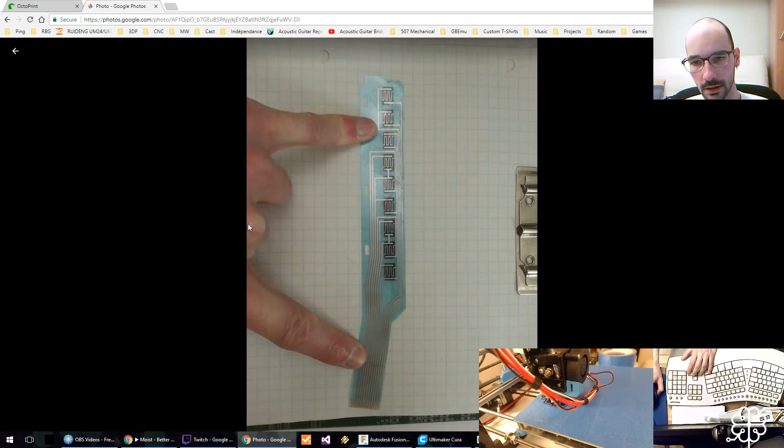Okay, I see. Alright, I can see that there's a bit of plastic stuck on my fan shroud, which is no good. But we'll have to do. So this actually doesn't look like a half bad picture. Let's try to find one that's in focus, and this doesn't look bad. This doesn't look bad either. Alright, these flash ones are crap. This best one, this looks like the best one. Let's download this.

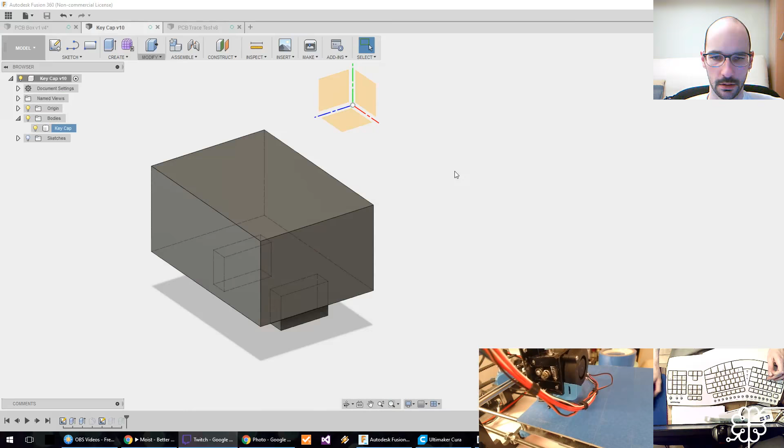I'm going to put this with the rest of the documents, which is not quite the right place, but alright, there we go. So time for some another type of, whoa, what's going on here? Another type of making.

Let's open this. Now let us rotate the picture. Oops. Like this, and then crop it. Okay, so I wonder if I can actually do a bit of a contrast job here, or whether I'm not even sure I need to do that, to tell you the truth. All right, so I created a new layer here.

I'm going to use the fill bucket tool. I'm going to tell it to sample the image, and I'm going to try to, that's not quite right. Alright, let's actually, so I click here and then bring the tolerance down. Yeesh. Yeah, okay, I see what's going on here. Okay, so.

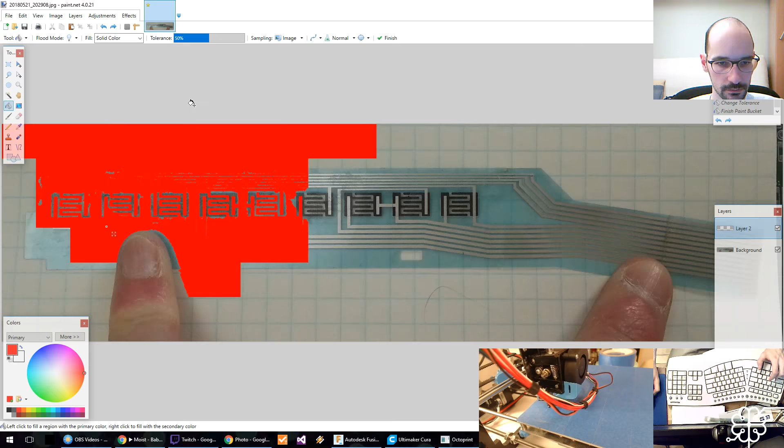Can I? So this is going to be useful. Can I contrast this? Oops, it's doing just a layer. Let me try to. Yeah, see this area here, around this here, winds up blown out because, and these are super dark.

So what I've done for this in the past is, this is kind of long, I don't know if I'm gonna set this up again. I can't actually even remember how I did it. But what I do is I change the blending layer for this. I'm gonna create a big brush like this, paint this white, say, and then here I'm gonna change the blending mode. Additive, nope. Burn, dodge, nope. These are extreme, reflect, glow, negation, overlay.

See, I'm kind of just messing around here to see if I can actually. So I've done this to adjust, draw black lines there. Yeah, I could draw black lines. I totally could. What I'd done for another.

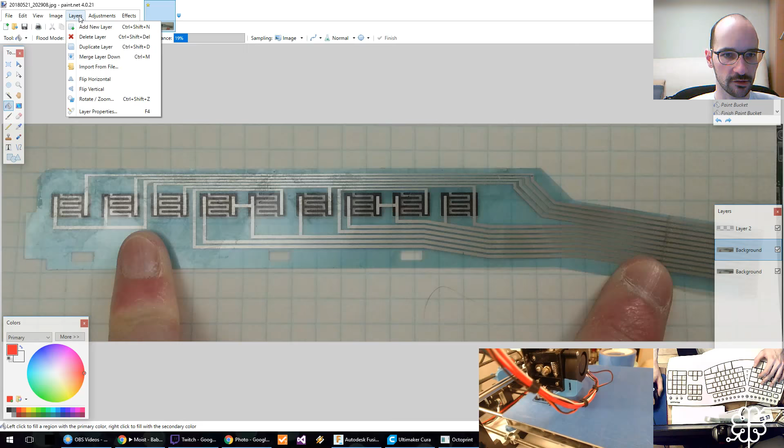Let me just for a minute, let me look at this other method I was thinking of. Okay, so contrast is looking good. I'll probably do what you suggested exactly, which is to manually draw some stuff here.

Oh, I got a problem with my sound card. Ooh. I hope this is not going to affect OBS. Alright, trying something here. Alright, I look like I still have sound. Oh man. OBS is using the card, so I can't rejigger it. I have a problem. I think the sound from the microphone is not going to work anymore. I might actually have to stop streaming here for like 30 seconds just while I fix this problem with my sound card. That's really unfortunate. I will be back. Sorry, in 30 seconds. Sorry about that. I got to stop for a minute there. I'll be right back.